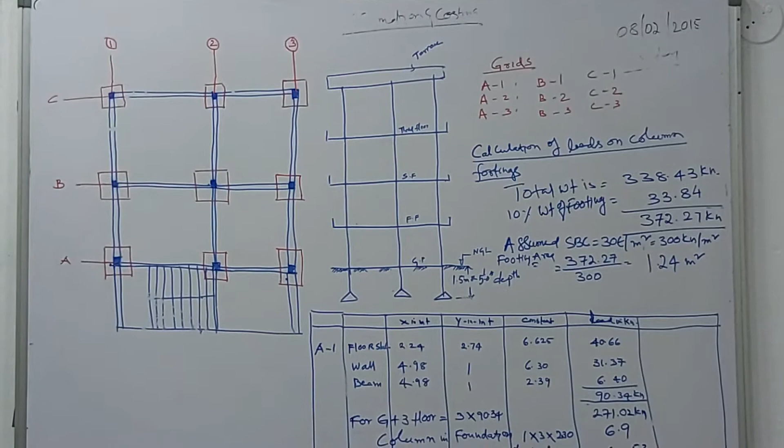Today I want to tell whether the stability of the structure is the valuer's responsibility or not. Whether the valuer is responsible, for the valuation which he is doing, from the building stability point of view or not. Because

nowadays some of the buildings, after completion, after constructing the building in all respects, of 3 floors or 4 floors or 5 floors or 2 floors, 3 floors or apartments, after that the builders are approaching the municipalities and getting additional floors. So the municipalities are also looking into the matter,

or the other way is TDR, transfer of the rights of some lands, some properties in road widening, which the municipalities are taking. For that they are transferring TDR, transfer of development rights documents.

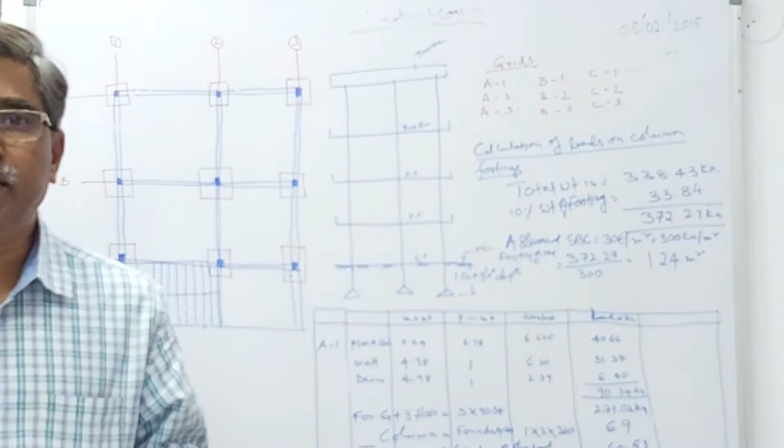So in this, what is happening? When they are purchasing TDR for an already executed, completed building, they are considering another floor. After completion, after occupation, after selling the total properties, these builders are approaching the municipalities and purchasing the TDRs and constructing another floor over the already constructed building.

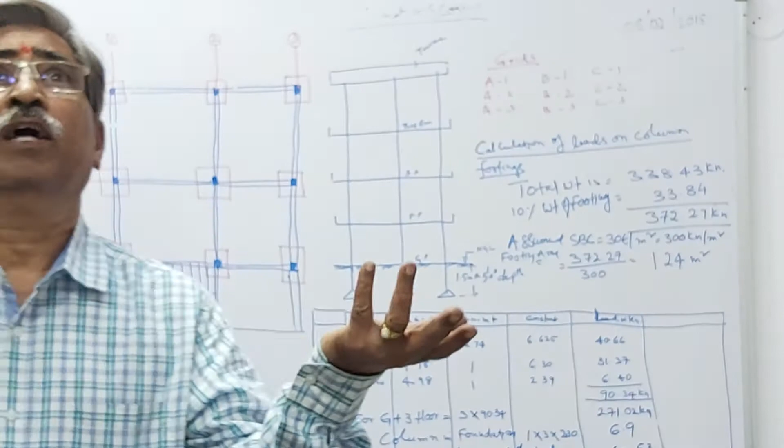Here, the major problem is whether the existing building is capable of taking another floor's loads or not. So we valuers think that the municipality has given the permission and legal is okay, the builder constructed another floor, municipal permission is given, everything is fine, and we checked the slabs and roofs and columns and inside the finishings and the specification, everything is fine.

It's a new one. Is there any implication? Is there any validity? Why are you talking about the validity and stability of the structure? Because if the building has been designed for 2 floors or 3 floors, after completion, if we want to consider another floor, will the existing footings take the extra floor loads or not? Can the building sustain such extra loads which are not included in the design?

Generally the design goes top to bottom. Construction starts from bottom to top. First we will put the footings, next columns, then beams and slabs, and brickwork, plastering, and other finishing items. These all come one by one. But the footing we lay first. So before laying the footing, we will design the footing.

For the footing, first we will design the slabs. The slabs will transfer the loads to the beams. We will design the beams, and the beams will transfer the loads to the columns. We will design the columns, and the columns will transfer the total loads to the soil through the footing. Then the footing design will be completed.

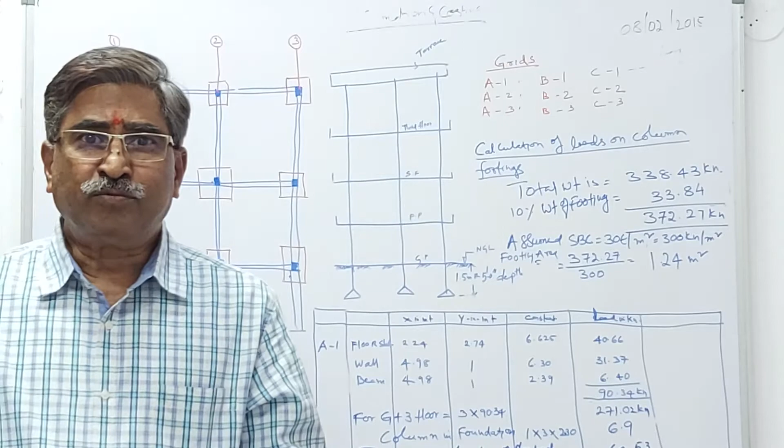Once the footing is completed for the designed loads, dead loads and live loads and extra loads, whether snow loads, seismic loads, wind loads, whatever it may be, once it is completed, then how will you add? Okay, there is also one technology. We can increase the footing, we can increase the columns. These two things are important if you want to add another floor; we can do structural restructuring and retrofitting.

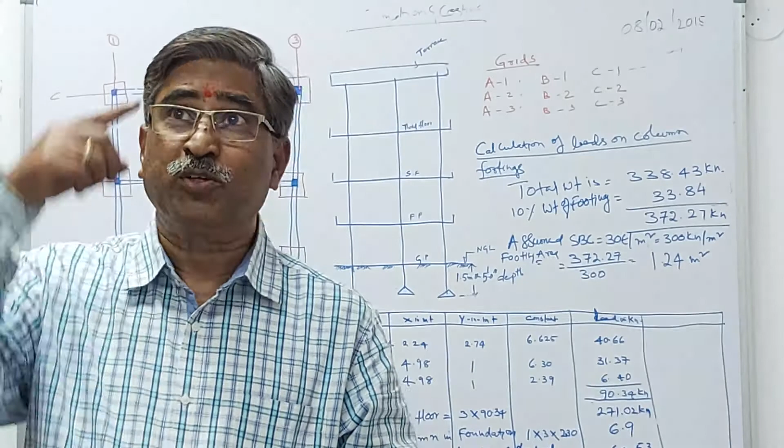In the method of retrofitting, we can increase the footing size for the extra loads coming, and we have to increase the column sizes to sustain such loads, and also the footing. But here, without doing this type of analysis, the valuer directly goes to the site, takes the photographs and measurements, just calculates the plinth area into the saleable rate and gives the valuation.

But who has to look after this stability? One should know. Without knowing this, if the valuation is given, if not today, tomorrow or in the long run, maybe suddenly or maybe in the long run, it may affect. In such a case, the total building will collapse.

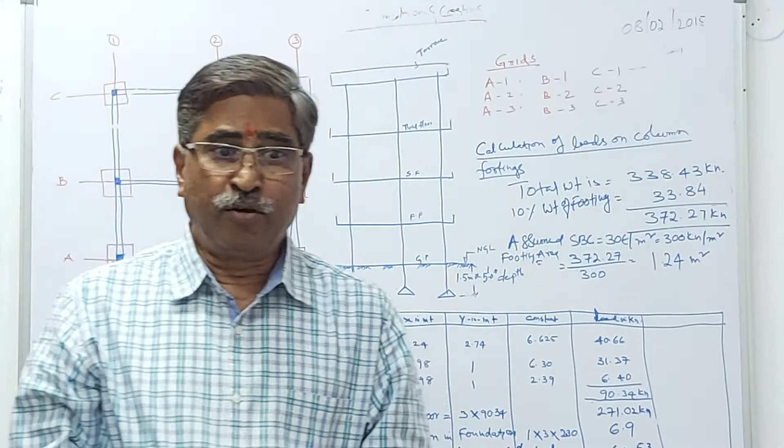So the major important point in this, the beautiful point in this: generally the footings will be designed for the actual loads, actual axial loads. No factor of safety will be there. So no extra factored loads will be taken into consideration. That's called the PU. So they are designed for exactly the actual loads.

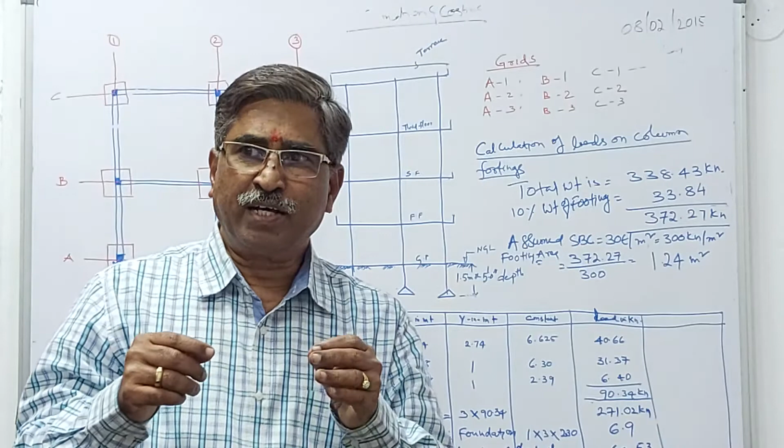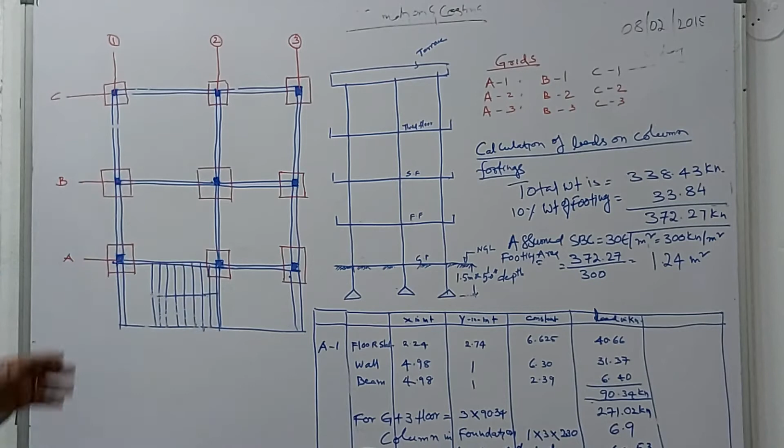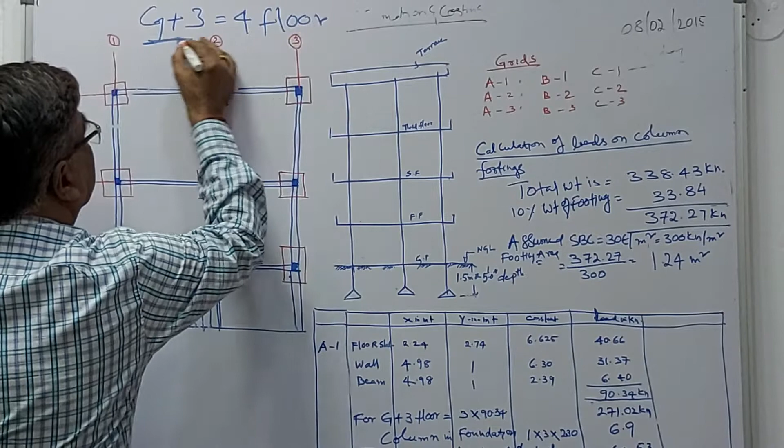So how will the loads be calculated? How will the loads come? So let us take one example. Let us take a nine-column building. Let us say it may be ground plus 3 floors, total 4 floors. Okay. 9 columns will be there, and the staircase is there. This overhanging slab will be there.

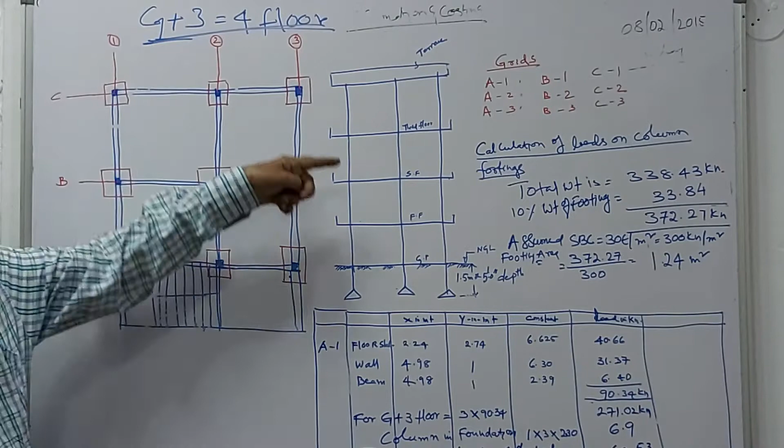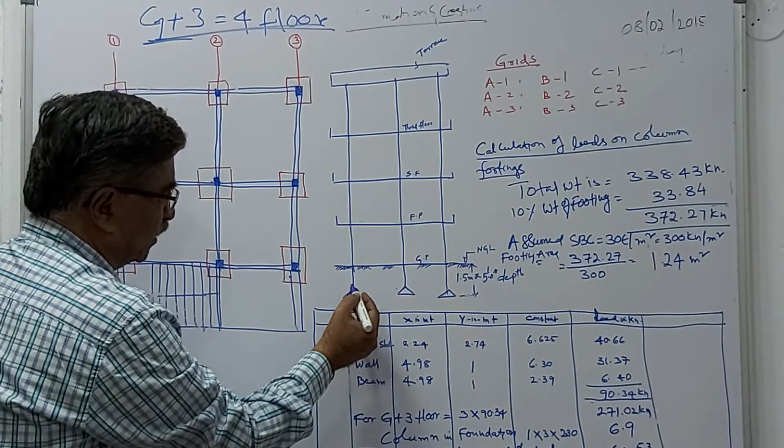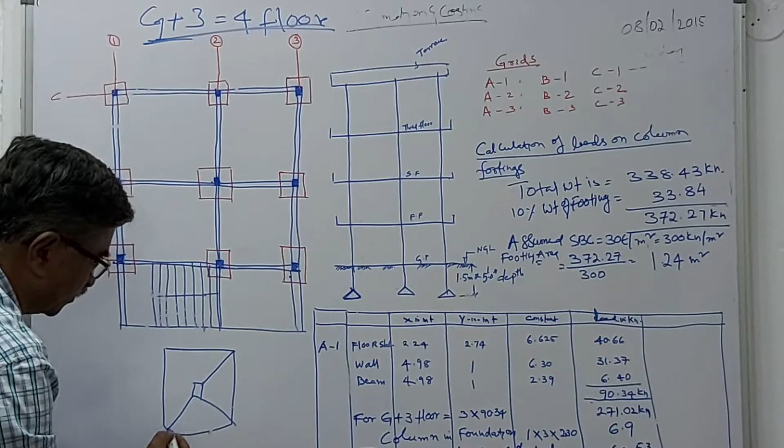This is the elevation. This is 1.5. We are considering 1.5 below ground level. The footing. This is a footing. General footing will be like this. Isolated footing. This is the plan. So this is the plan. The elevation you will see like this.

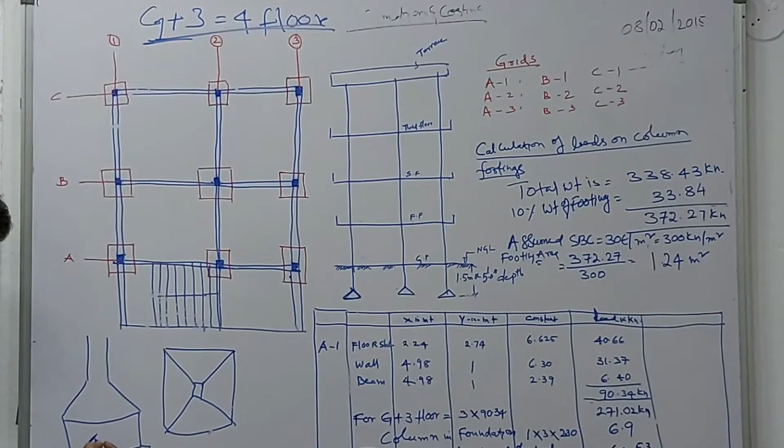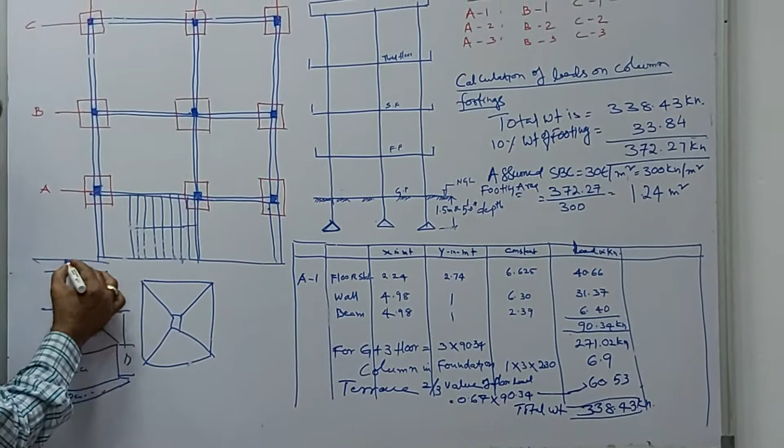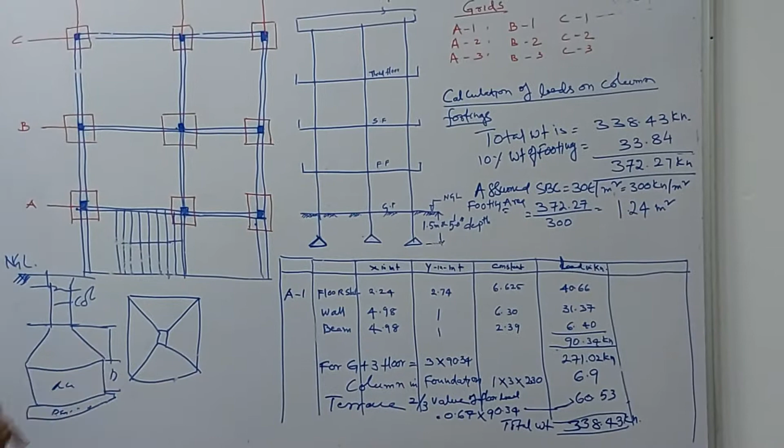This will be PCC, RCC, some depth, effective depth. Next, this will be there. Now this is NGL. So this is this footing. So this is the depth that will be there. Again, this depth will be there. So how will the calculation be done?

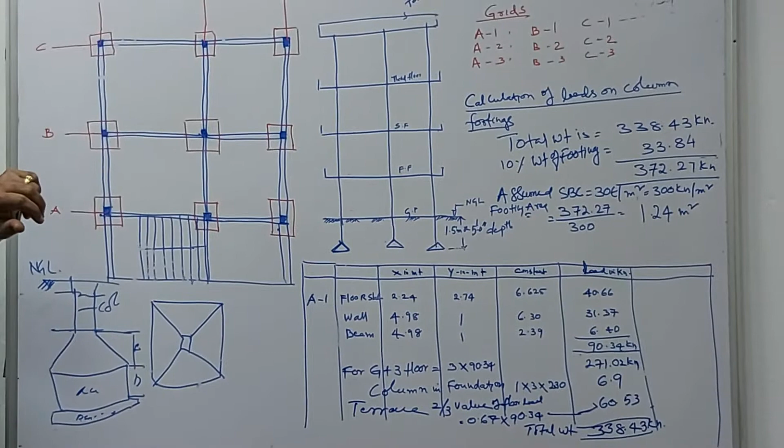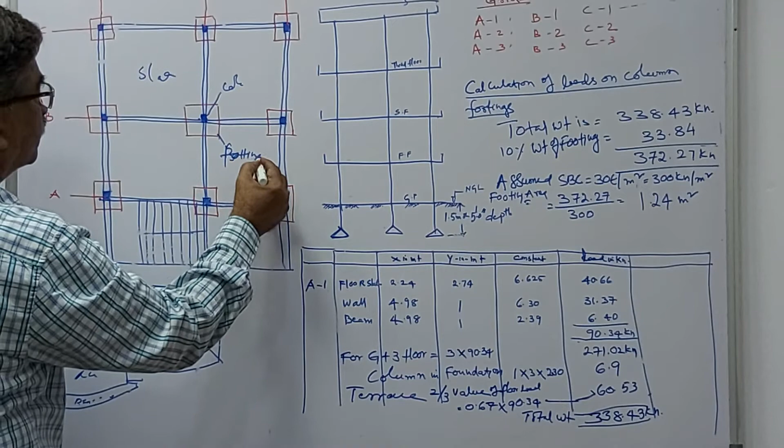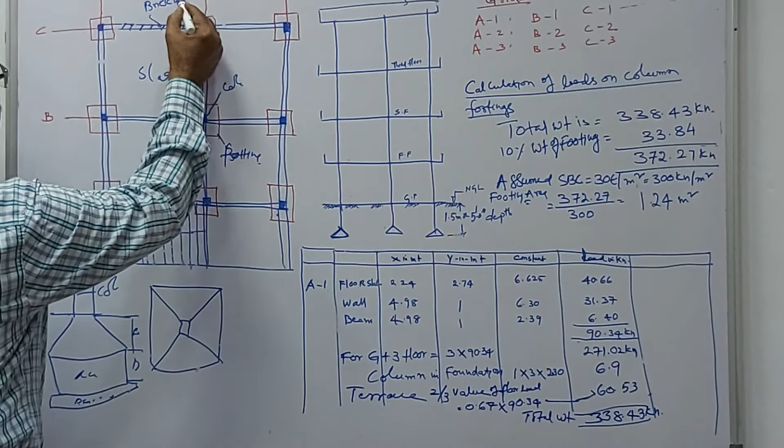Now this is a beam. This is a slab. This is column. This is footing. This is footing. This is slab. And next a brick wall will be there. Brick walls may be 9-inch walls and 4.5-inch walls with plastering. So generally how do we calculate?

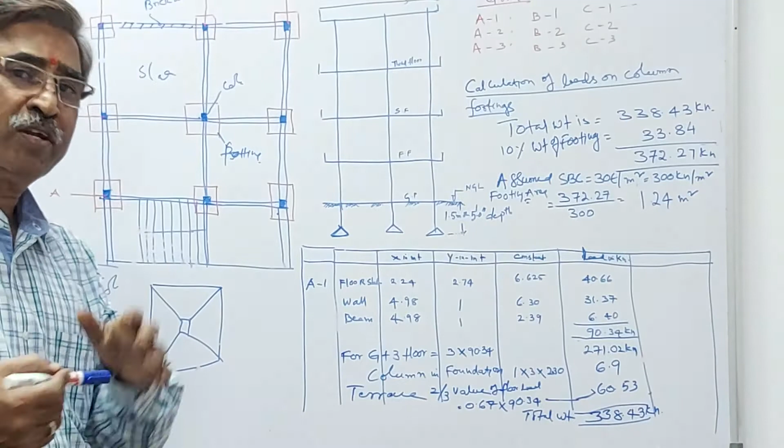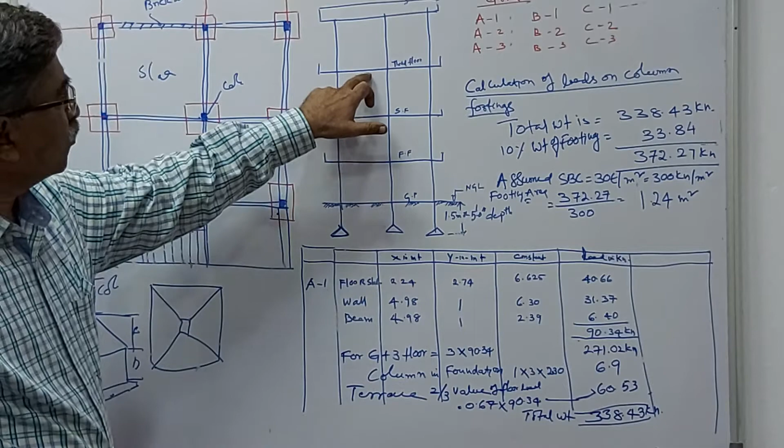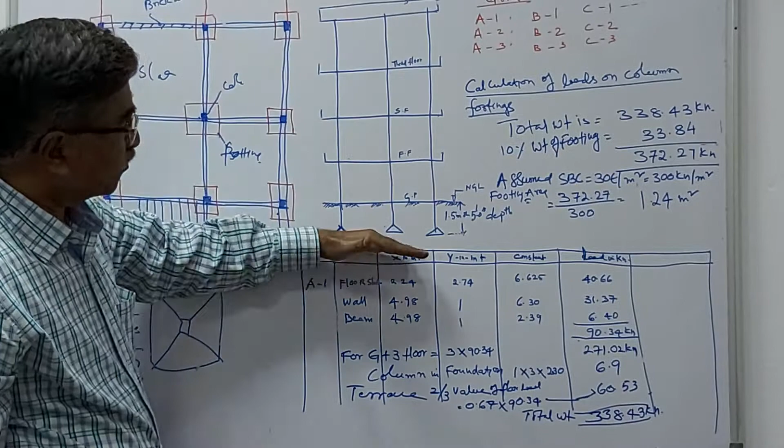Suppose for the ground plus 3 floors building, this is the plan, this is elevation, this is the ground floor, first floor, second floor, third floor, terrace. Now what we will do? The loading will come top to bottom. Let us take one column. That is A. This is a grid. You can see here A grid, B grid, C grid.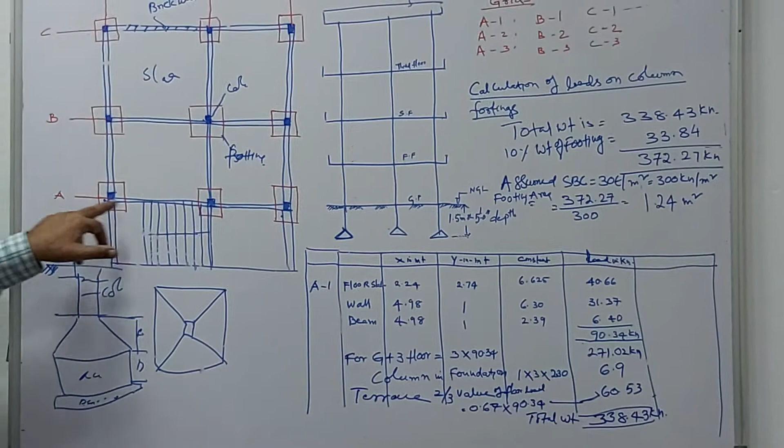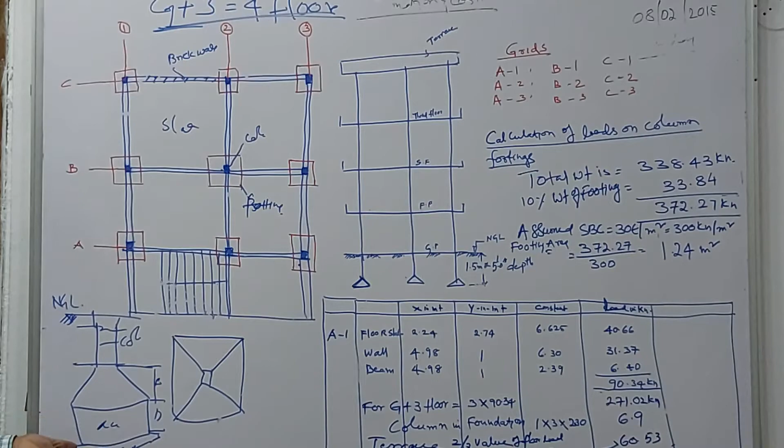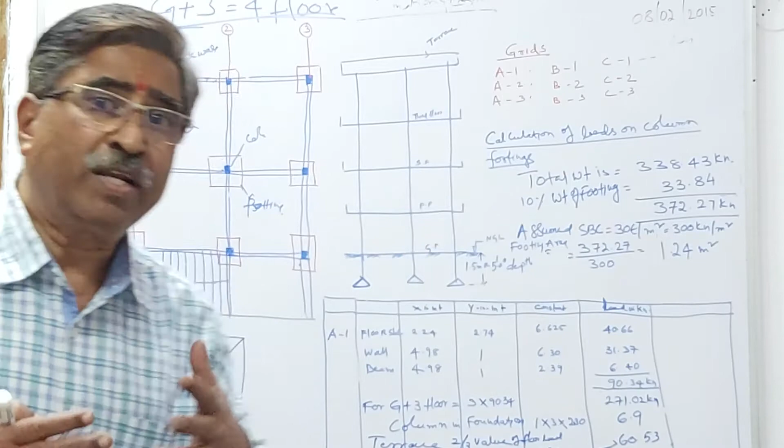A1 column, A2 column, A3 column, B1 column, B2 column, B3 column, C1 column, C2 column, and C3 column or footing. We can give the names in so many ways, F1, C1. Depending upon the loadings, the column sections also change, and the footing size also changes. How will we calculate? We'll calculate in this way.

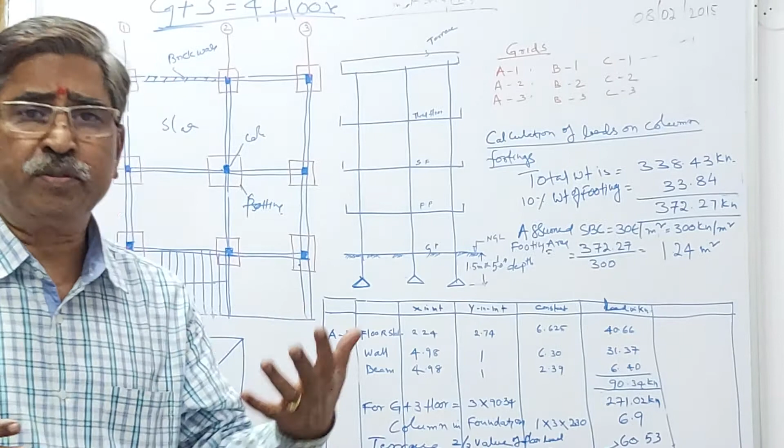X direction, Y direction, constant, and the load in kilonewtons. Which is the load in kilonewtons? Dead loads, live loads, snow loads, seismic loads will be there, and any other loads depending upon the type of building. Depending on the type of usage, the live loads also change. Dead load will not change; dead load changes according to the sections.

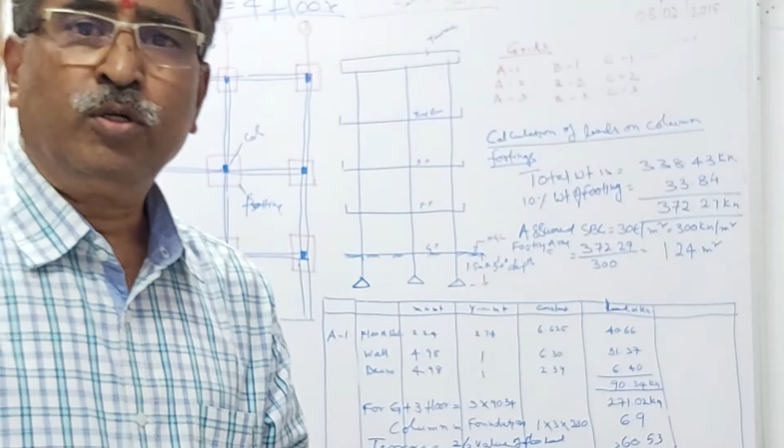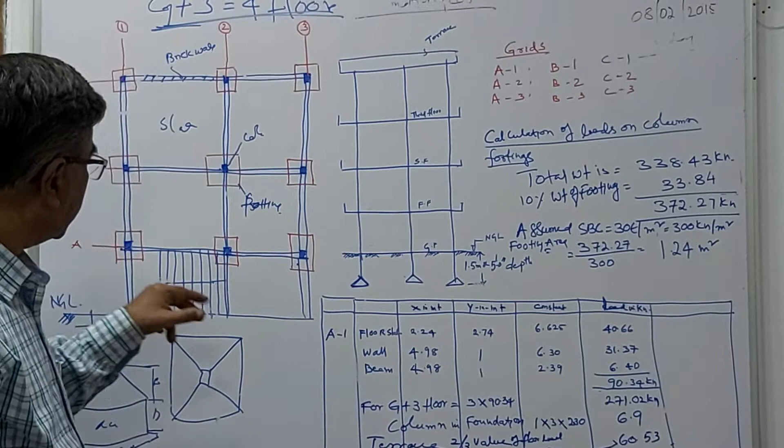What is the dead load of RCC? Steel and concrete. It may depend upon the grade, M20, M30, M40, M50. But whatever it may be, RCC will be 25 kilonewtons per cubic meter. Okay. So how will you calculate? First we will calculate the floor slab load in X direction, next Y direction. Only 50% of the load will come to this column.

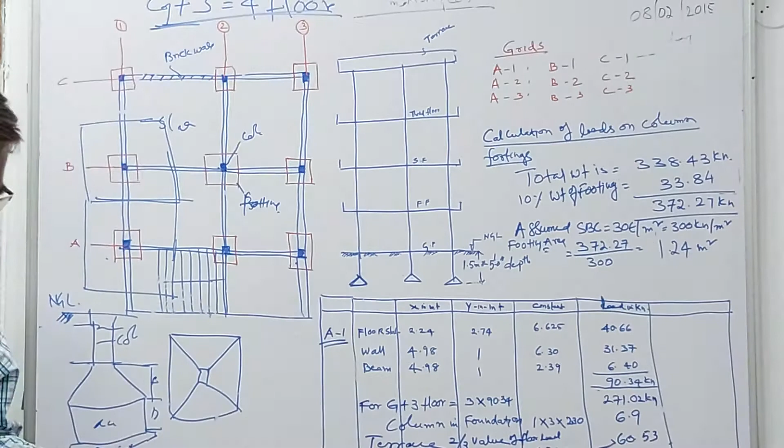Suppose we are taking A1. In X direction, from where is it working? From here to here only, because there is no extension here. If there had been an extension, you would have taken that load also. X direction slab means from here, here and here. So this is Y direction, this is X direction. X direction and Y direction, constant 6.625, the total is coming 40.66 kilonewtons.

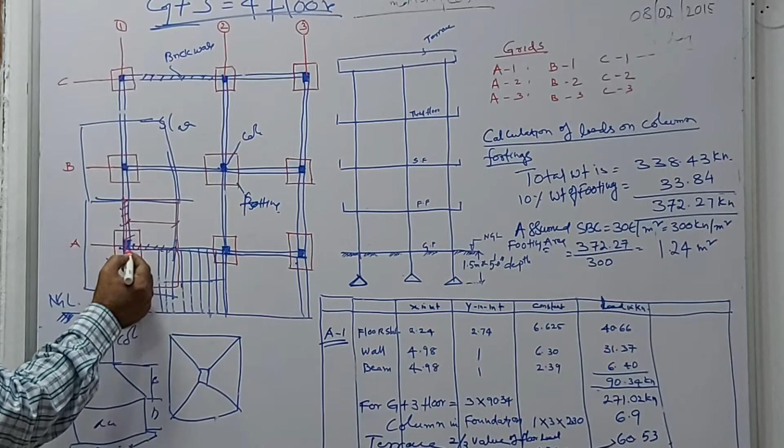Next, wall load. Where will the wall load come? Up to this place and from here to here, because we are calculating this A1 column. So 6.3 wall load. Beam load: from here to here, total beam 4.98 meters into constant 2.39, coming 6.40. Total load is coming 90.34 kilonewtons. So one floor load is coming this.

So how many floors do we have? We have 1, 2, 3, 4 and 5 slabs. Now we have ground plus 3 floors. 90 has come for one floor, into 3 floors, total 4 floors. The total load is coming 271 kilonewtons.

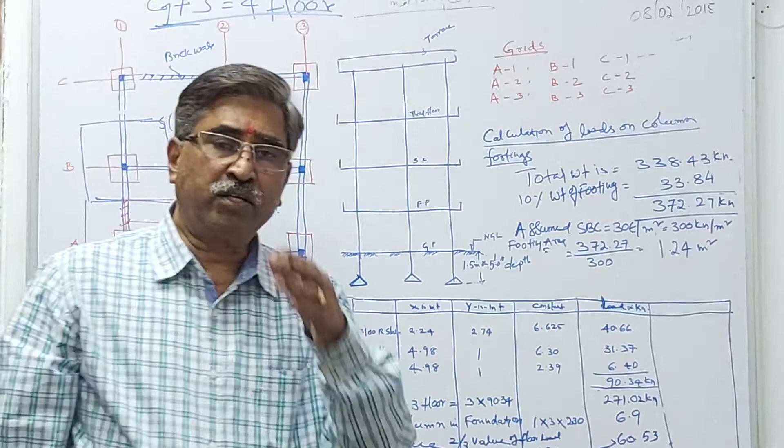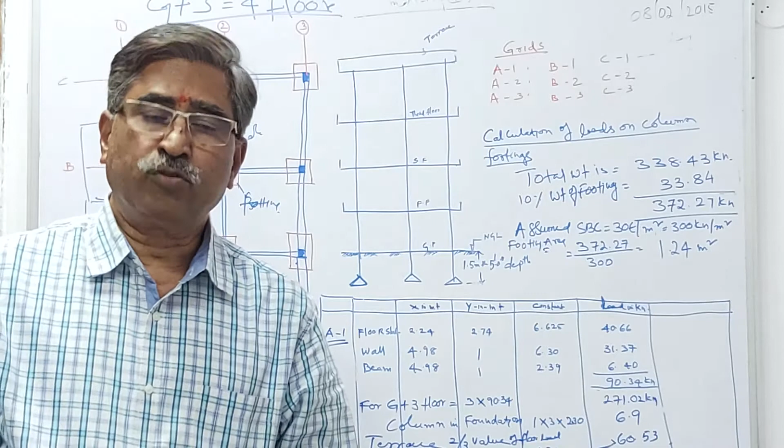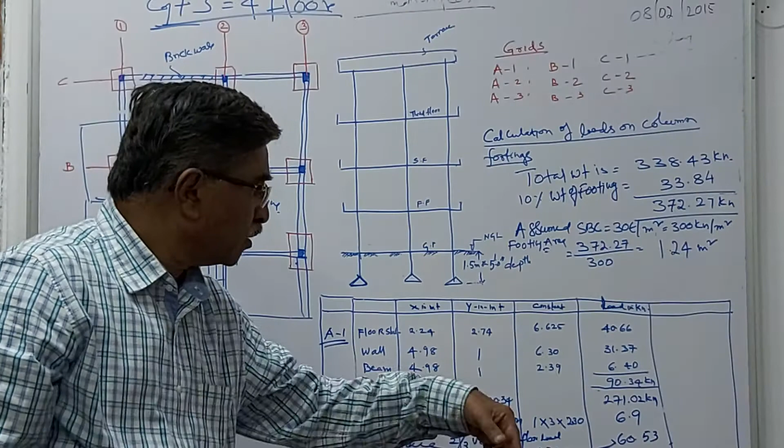Next, the foundations. We are considering the column above the floor, but below the floor it will go into the earth, 1.5 meters, 2 meters or 3 meters according to the bearing capacity of the soil. The soil mechanics professors will give the SBC and mention the depth. So for the difference, the column in the foundation will be there. It is 1 meter. It's coming 6.9 kilonewtons. Okay.

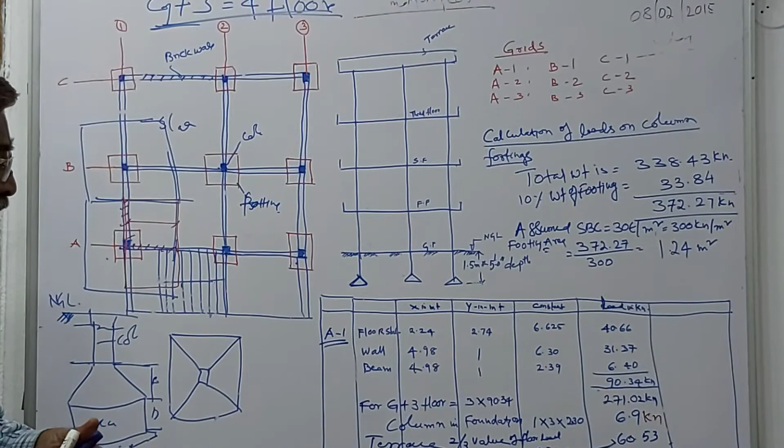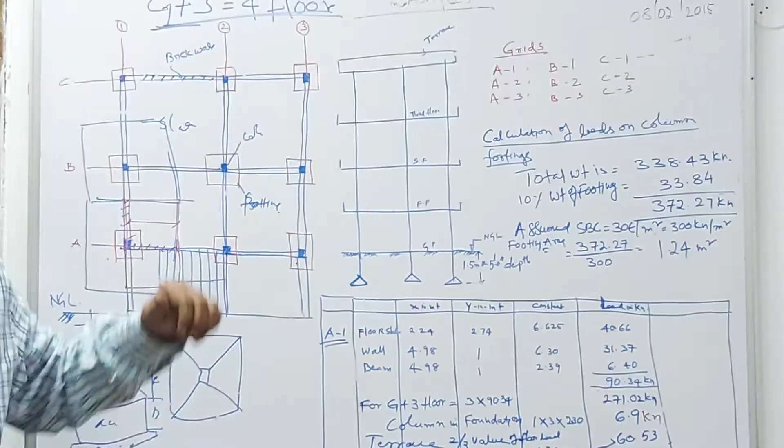6.9 kilonewtons. Next, the terrace floor will be there. Whatever the loads are coming in, wherever persons are living, the loads will be different. On top, the total load will not have the wall loads. Only the parapet wall will be there, the 9-inch wall will not be there, the slab above will not be there, and live loads will not be there.

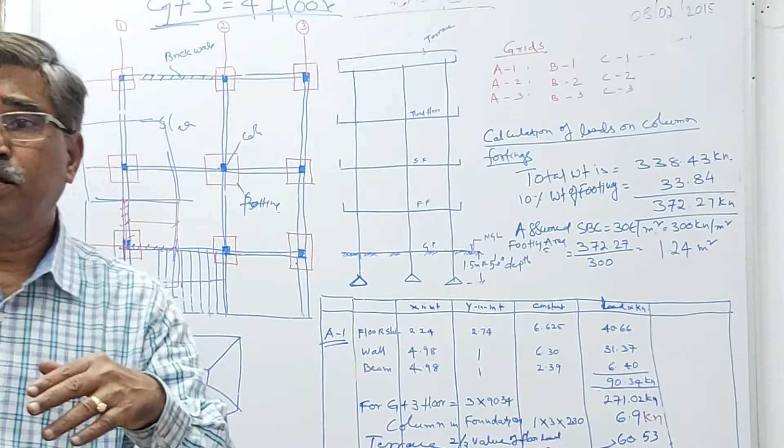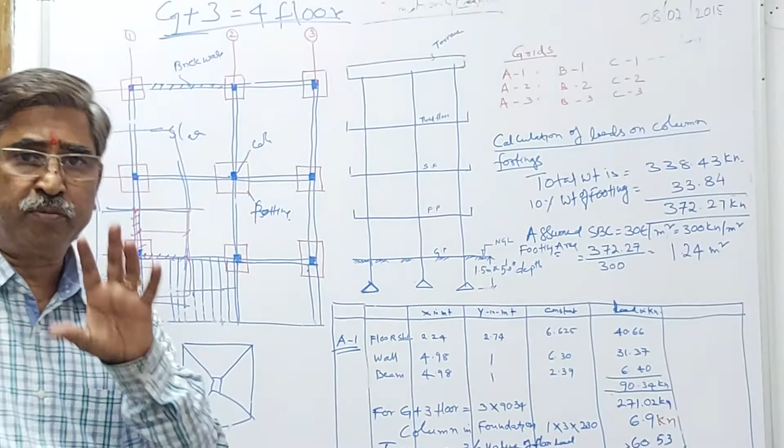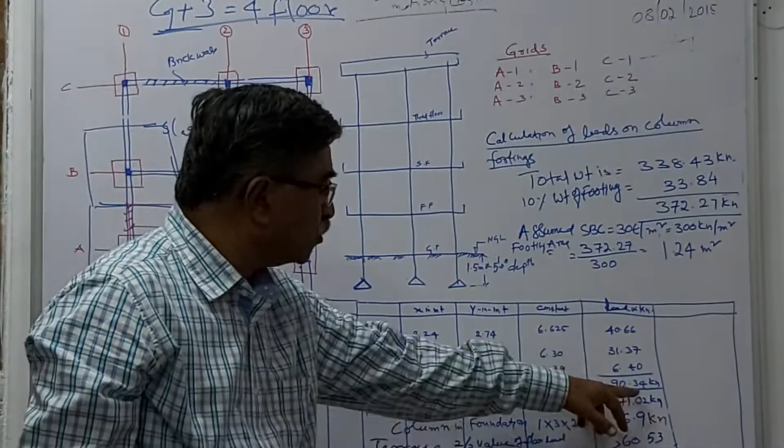Of course you will take the live loads, finishing loads, but it will be 2/3 of the floor load, that much will come, suppose even you calculate it. So 2/3 of the value of the floor load, 0.67 into 90, because 90.34 floor load has come. So total it is coming to 338.43 kilonewtons

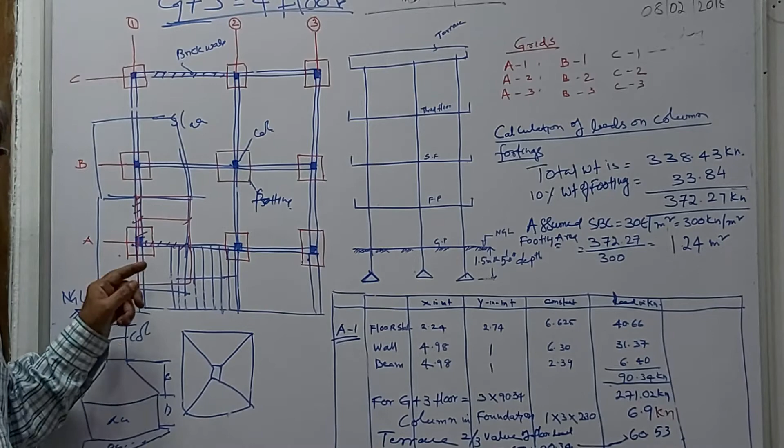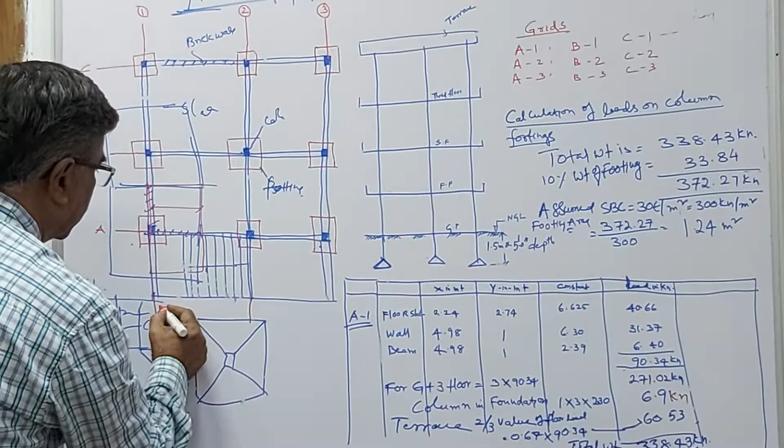on one column, because of the length. In the x direction it is 2.24 meters from here to here. This is 2.24 meters. From here to here it is 2.74 meters. But here in this column you will get only 50%. But in this middle class column, if you are taking it, it will come like this. But because this is the overhanging portion, the total length will come.

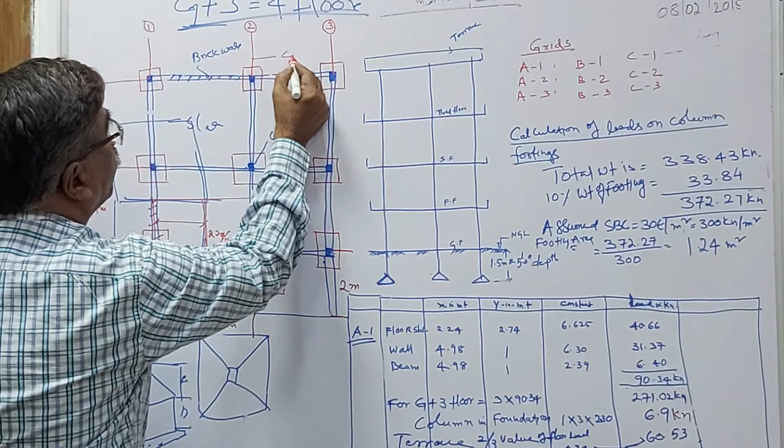This will be 2 meters. You have to calculate the 2 meters, total 2 meters load will come in this column, and from this it is half that will come, 2.24 by 2. Suppose from here to here is 4 meters, so only 2 meters will be shared by this, 2 meters shared by this. So this much total load - half of this load, half of the beam load, half of this, half of the floor load of this, because it is cantilever.

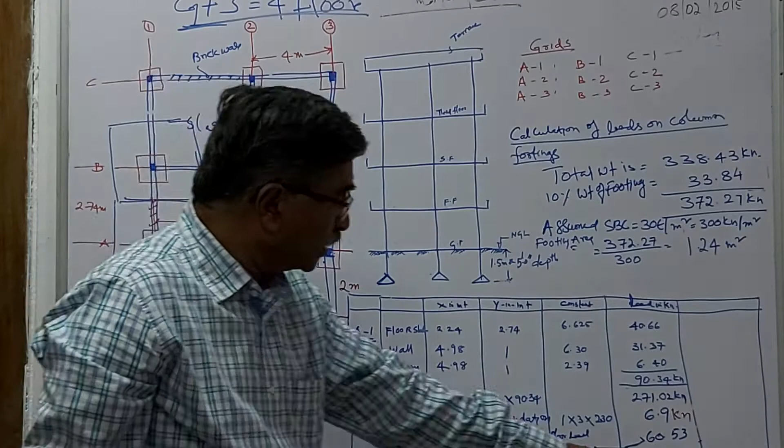Like that we are calculating. So the total load of the one column has come. How much? 338.43 kilonewtons. In this, now the total load is

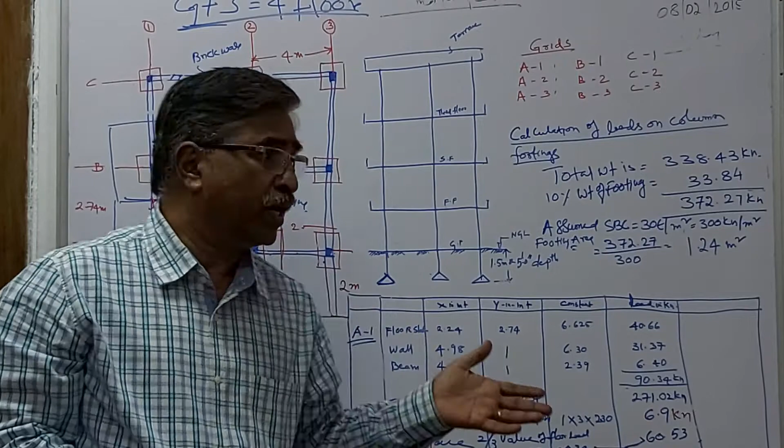338.43 kilonewtons. Next, we have to consider 10% of the footing weight, the concrete footing weight is to be calculated and added to the total axial load. So how much is coming? 10%, 372.27 kilonewtons. Now we have to design, we have to find out the area of the footing.

Area of footing we have to assume the SBC, or we have to consult with the geophysics engineers, soil mechanics engineers, soil mechanics consultants to know the bearing capacity of the soil. If you know the bearing capacity of the soil, for the depth they will give - for 3 meter depth, 30 tons or 25 tons or 50 tons, whatever it may be - according to the depth they will give the results and parameters, and how the foundation should be - open foundations or raft foundations or whatever the foundation may be.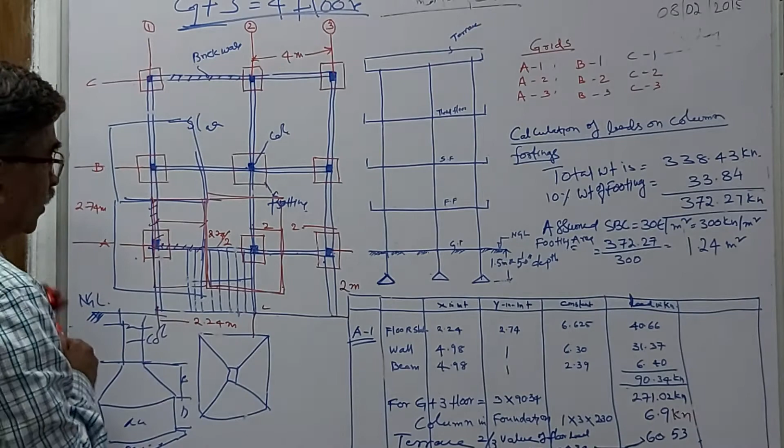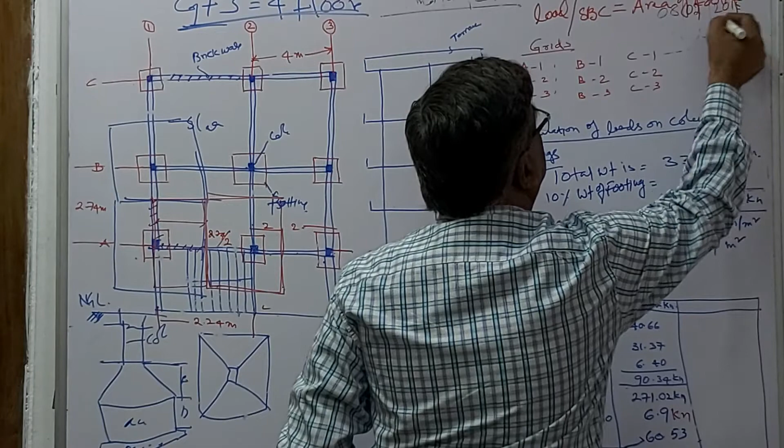Whatever it may be, load by area - the total load which is coming on this column, the load whatever is coming on this column, load by area. Load by SBC is equal to area of footing. Load, what is the total load? Total load is 372.27 kilonewtons. So SBC, assumed SBC is 30 tons.

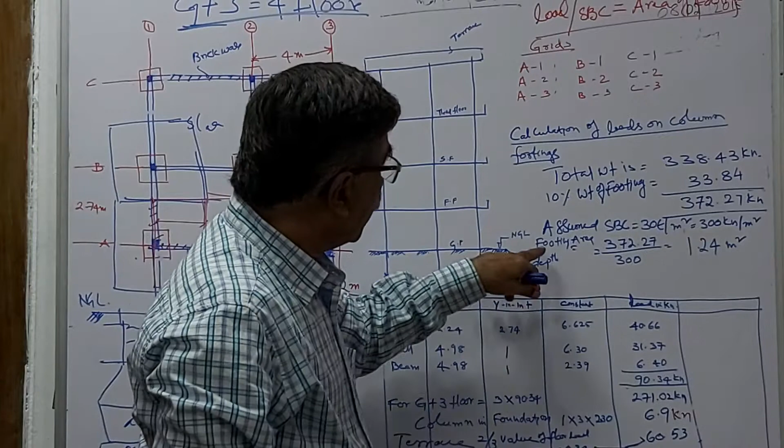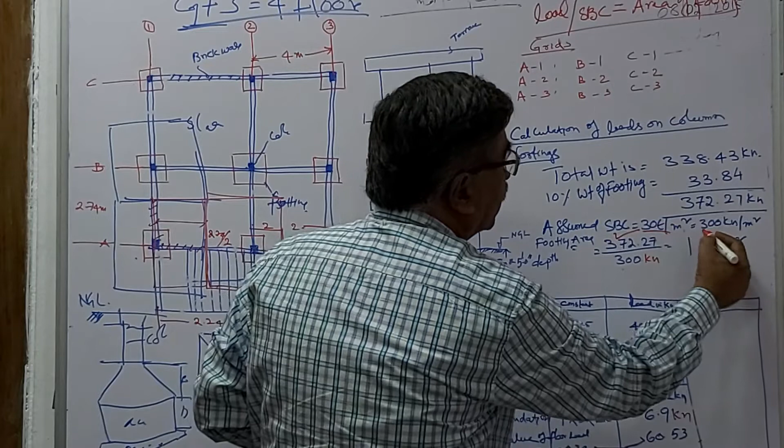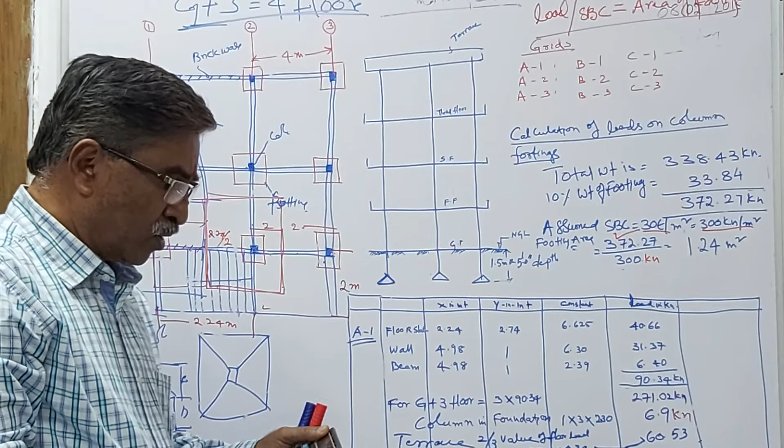So now the footing area: 372.27 divided by 300 kilonewtons - 30 tons is equal to 300 kilonewtons - is equal to 1.24 meters square, the footing size. So 1.24 square meters means how much will it come? We have to root it on one side, two sides: 1.24 root is 1.11 meter. So the footing size will be 1.11 meters by 1.11 meter.

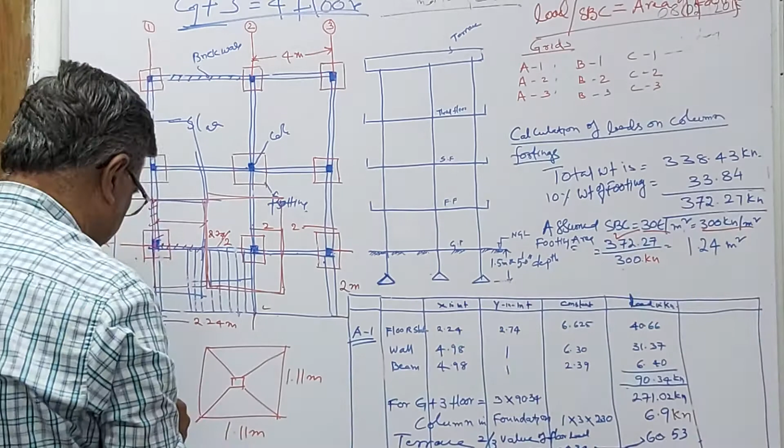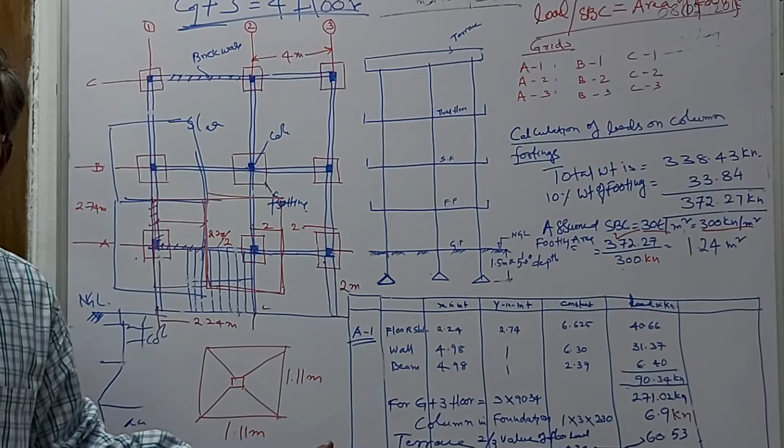So this is now we got the footing. Once the footing has come and we lay the footing, no further load will be taken. Now you all tell me whether the civil engineer has to look after this or not.

For apartments, somebody will design - nothing wrong in that. Directly permission has been granted and design has been given by some valuer or engineer, and they design, the building has been constructed. Of course, 99% of such cases are only independent houses - one plus one floor, two floors, or one plus two floors - maybe that will take care of it. I will tell you later how, without knowing it, 5 feet by 5 feet footing sizes are given for ground plus 2 floors with 9 inch by 12 columns, and they constructed 1 plus 2 floors.

How it is standing, I will let you know later. But here, when it comes to apartments...

Generally 99% of structural designers will adhere to and mention in their structural design, while giving the footing drawings, that the building has been designed for ground plus 3, ground plus 4, or ground plus 5 floors, with the bearing capacity of the soil being this much. They will also mention what mix is accepted, M20, M30, M40, and the steel grade in the drawings.

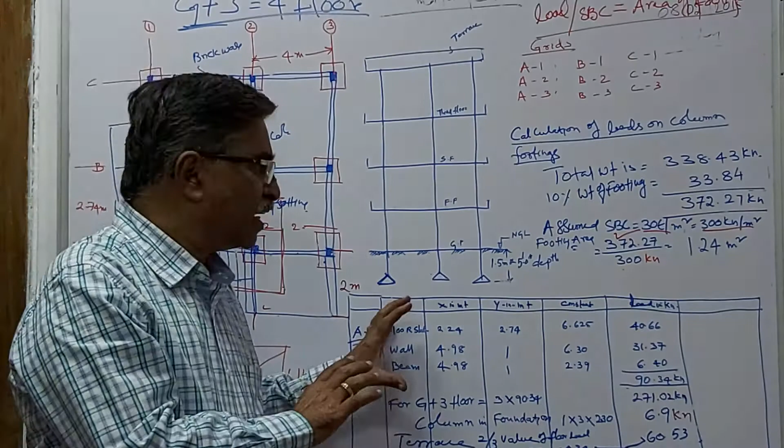They don't know, because one has to read all the technical data, keep it in mind, and go by the codes or something else. At least this minimum knowledge of structural detailing, structural design, and stability - how stability comes - should be known. If one knows it, it's well and good.

So practice it. All these things are like Ramayana, Mahabharata, Bhagavata, Bhagavad Gita, which is told by gurus. Only a guru can tell this.

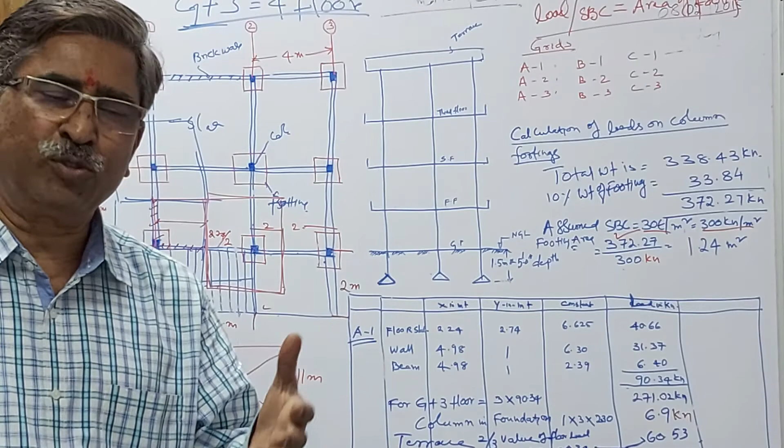So for your good purpose and for the best practice, today I have written and explained this here. Follow this. If you have such questions or anything else, ask anybody who knows about structural stability. But don't blindly give the valuation.

Another thing - don't think that stability is not valid for you. It is valid for you because it's technical. We are technical engineers. We studied civil engineering for 4 years. All these things come in civil engineering from the first year onwards.

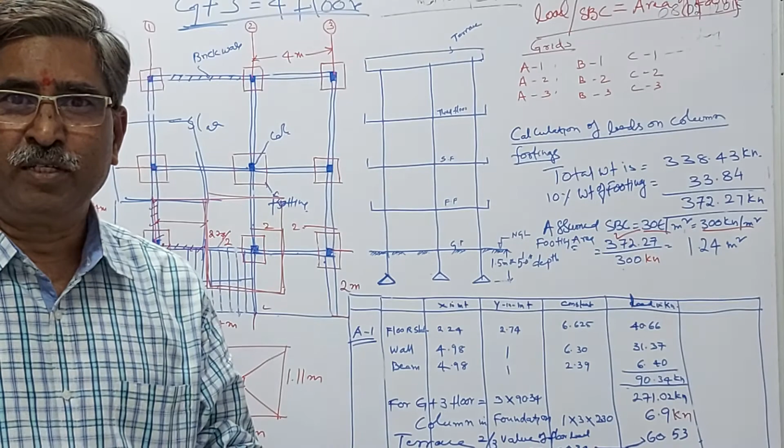You studied RCC, materials, steel, soil mechanics, strength of materials - everything we studied. So don't think it is not our purview.

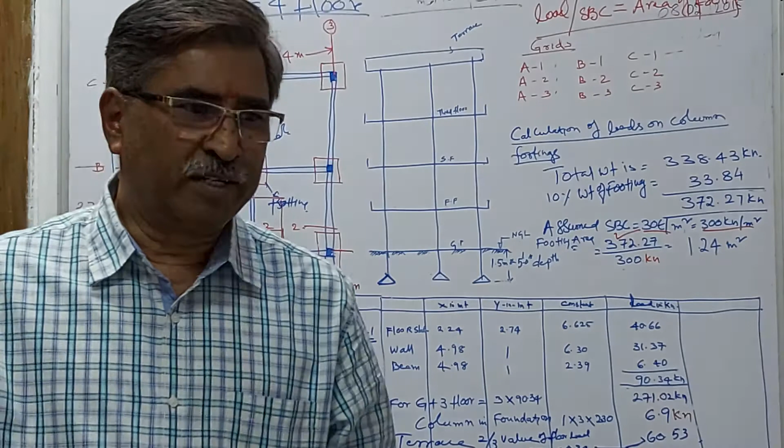It is like - I cannot say it's innocent. No, once a person passes as an engineer, he cannot be treated as innocent in the subject. So practice it and study more books on this.

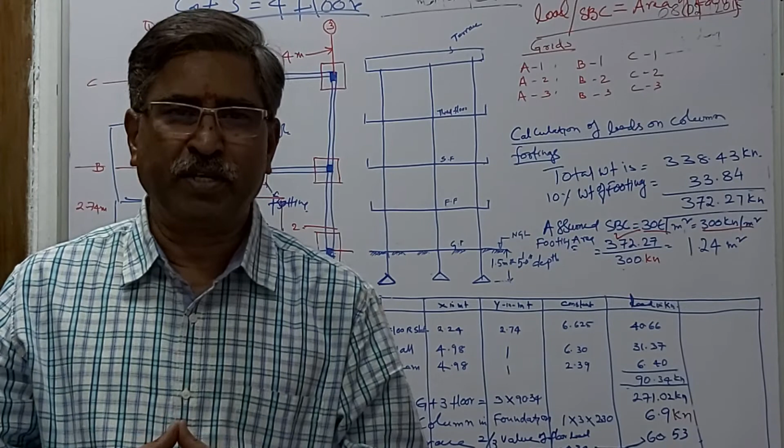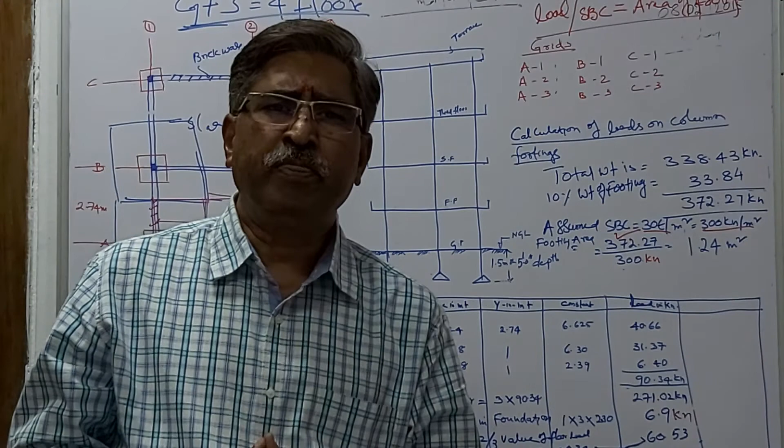At the time of preparing valuation reports and at the time of inspections, just keep this idea in mind. If you have any doubt, ask your seniors or those who have the knowledge, and go through this. Even if it is unable to understand, or if it's more complicated, you need to inform the bank officer. We have to take a structural stability certificate from structural engineers who are competent to give such certificates.